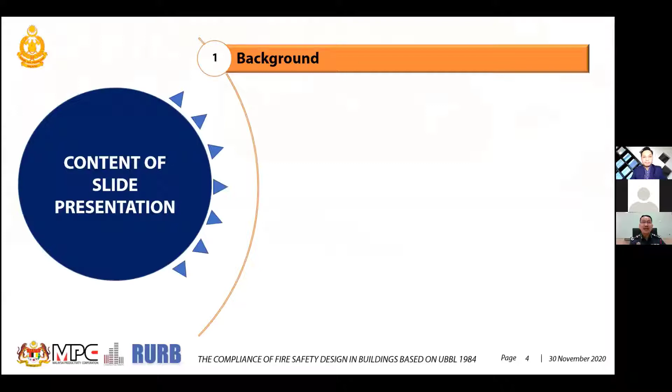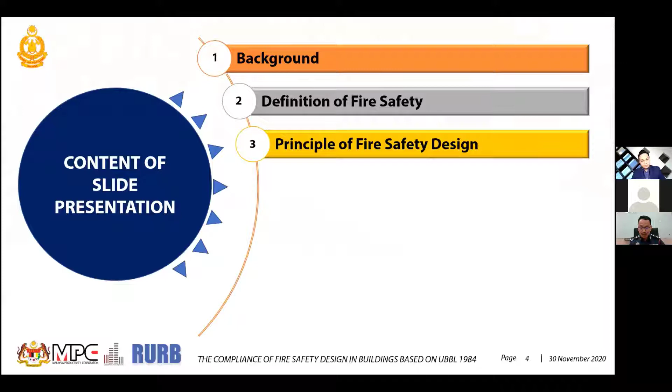Okay, I'm not going to give you a lecture, I'm just giving you a little glimpse. What is the fire safety design based on the UBBL? What is the spirit of the UBBL? We must remember the UBBL is not... the content is in my presentation. You have the background and definition of fire safety, the principle of fire safety, plan approvals, the problems pertaining to approval, and also the provisions in the UBBL related to fire safety.

I express it again, this is not a lecture, not a class. It's just to give you a glimpse of what fire safety is about.

If you go to other countries like the UK, US, and Japan, the awareness and fire safety concept for all citizens is very high, but not in our country. I hope that with this seminar we will be able to give understanding to the professionals here, from IEM, from PEM, and a few others, and to the industry pertaining to fire safety.

So I'm going to give you the concept, the principle of fire safety. This is very important to understand, so that as you submit the plan to us, as you design the building in our country, it's safe, and at the same time it can speed up and minimize the time, and it's good for you, good for us, good for the industry, and good for our country.

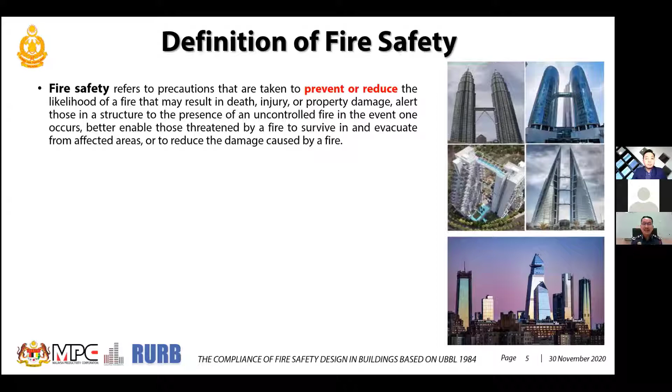Okay, if you see, under fire safety, the focus is on taking prevention and reducing the likelihood of fire resulting in death, injury, and property damage, and ensuring all structures can resist uncontrolled fire. I'm not going to read this one, but the concept here is to prevent and reduce any fire, and safety measures need to be taken. The next one.

What threatens fire safety is fire hazards - that which always happens and threatens and causes fire. By the way, as the moderator just told you, I was in forensics for almost 12 years, and I understand the design that leads into fire. In fact, I have gone to court for a few times for non-compliance cases where buildings caused fires.

So fire hazard is the one that threatens fire safety. If a layman wants to interpret what fire safety is, like Oxford Dictionary gives you a very clear concept: to adopt or enhance measures intended to minimize risk of harm from accidental fire, or safety from the danger and injury in the event of fire. This is a very layman understanding of fire safety - you could imagine if a layman can understand this type of concept.

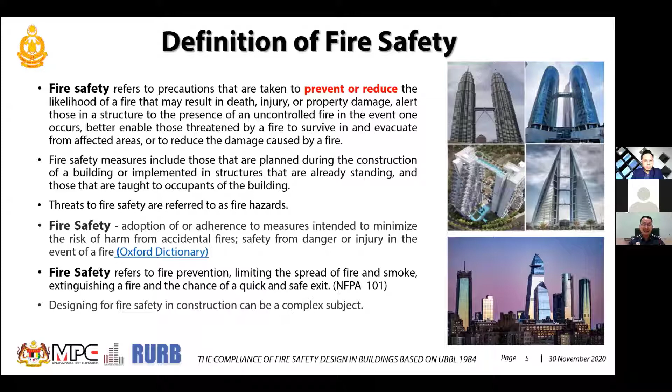To design fire safety in construction is a more complex subject - it's not like a standard. Next.

If you see historically fire safety design, the building has been concerned with innovative design. With this innovative building design, you could utilize fire safety engineering rather than having a purely functional based code. So we give room for architects, for designers, to achieve their innovative, cost-effective design to meet the fire safety design needs. Even though they have innovative design, don't forget the fire safety design needs. So fire safety engineering gives you room to further develop your design.

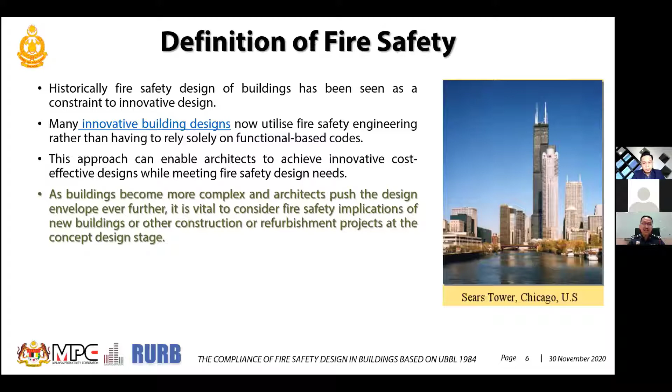Okay, next. To be a successful designer in terms of fire safety, we're looking into the issues, the components, and tracking the fire source - how smoke moves, heat transfer, and in other words the chemistry of that, and also human behavior and toxicity. That is all about fire safety as well.

The project's fire safety implementation depends on building regulation - what regulation you're going to use, what standard you're going to use as you go to us. Always remember, UBBL does not belong to BOMBA - it belongs to all of you and all of us. It's our responsibility to make sure that fire safety must be according to the regulation and to the standards.

I'm not restricted to Malaysian standards only - it could be international standards, whichever is more relevant and more applicable for all your design.

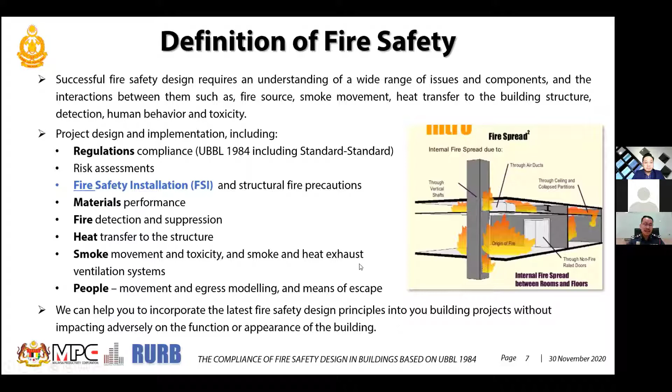Prioritize what fire safety measures take place in your design. Okay, and also the fire safety installations - I'm using the word according to the Fire Service Act: structure fire precautions, material performance, fire detection and suppression, and the heat transfer of the structure and so on.

So, in the past, almost 30% of plans are rejected when you submit to BOMBA. So in this case, that's why we are looking to discuss with professionals, to give you this seminar this time to tell you how we can reduce this.

We must have a strategy to reduce this. Unlike Singapore and a few other countries, where the responsibility of the designs - architects, engineers, and all the fire safety industry - they take fire safety as a very high priority. We don't want any fire to happen which causes death, like the Grenfell Tower and a few others recently in Dubai as well, and China as well.

See, in China almost every month there is an industrial fire, which causes loss to the country and also to industry and also job loss.

To achieve this, we need BOMBA and the fire rescue department to cooperate together with professionals and the industry as well. It's not our objective to delay or postpone your designs - it's our objective to speed up the whole process. But you have to work together, and you have to proportionally and highly consider fire safety as well, and this is the thing you need to prioritize. Next.

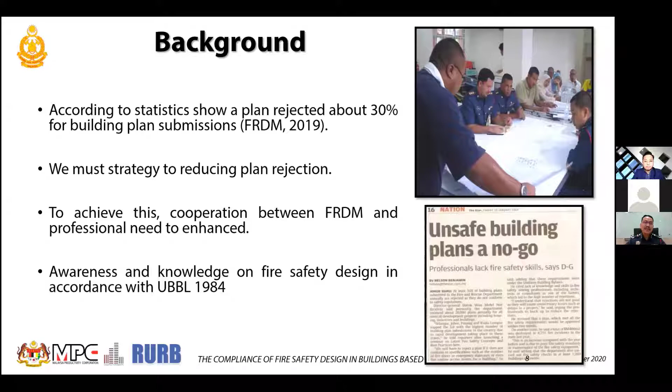The objective of fire safety in the building is, first, life safety. When a building catches fire, you must know all the occupants - that's why we're talking about human behavior. You must know who the occupants are; if the occupants are comprised of elderly people and so on, you must prioritize how to ensure life safety in that building. Number two is property protection, and also business continuity and environmental protection.

Praise the Lord, in our country we have not had a big incident besides that tahfiz case, where 26 people died. It's a very simple building, but it cost 26 people their lives. We don't want to hear that again. It's simple, but because of a few things we didn't do, suddenly it caused a lot of people to die. When I was doing the forensic investigation in this case, I could literally cry to see the children die - 26 of them.

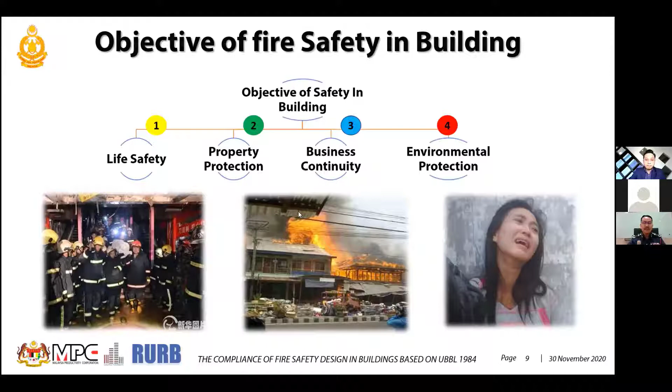That is something we really need to take priority on. Next, so we are talking about this - I'll give you a little bit of the concept. I'm not going to tell you in detail what fire safety is about.

The first one, according to UBBL law, is fire appliances access route. We have encountered a lot of problems because the KM was endorsed without any consideration of fire safety access roads. Some buildings, when they come to us, cannot proceed because the KM is already done. This needs to be prioritized. Those who do the KM, please take all these measures into account - the minimum perimeter, the width, the load or capacity, the gradients, the distance from the building to the end of the road, and whether it needs to be aligned so the turntable ladder can turn. All this must be included in the beginning part of the KM, because the fire and rescue department has not been consulted in terms of the KM.

So when you come to BOMBA, you already bring something already endorsed by the KM, then we run into trouble. I hope you take this as a priority - we don't want you to come to us saying the KM is already endorsed, then ask us how to solve the problem. If it's simple, we can solve the problem, but if it involves cost and involves space, it cannot be done, so we can't fix it. In the end, we delay the projects. We don't want that to happen.

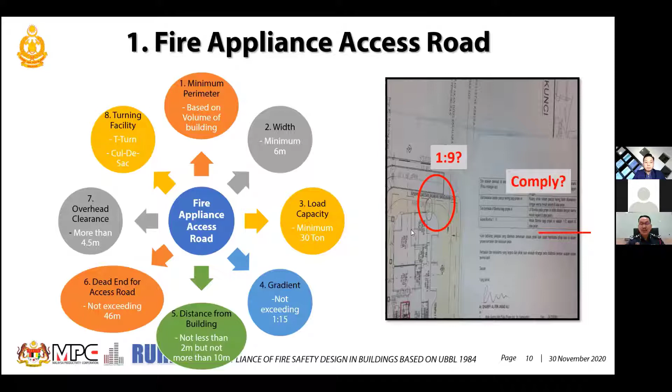Okay, next - means of escape. Prioritize this, as it involves life. For means of escape, make sure you design the travel distance accordingly, per Schedule 07, the dead end, the corridor, and also the exits - every part of the exit designed accordingly. There's a protected staircase and a firefighting staircase - two types of fire staircase. You know well, the firefighting staircase is the staircase that includes all the firefighting systems in the building, and also the firefighting access lobby. I'm going to introduce one more later on. The fire lift is also included.

Final discharge - this is one thing I'd like to talk about here. According to UBBL, final discharge means you go out into a safe place. But many times we fail to do this - let's say the staircase in the middle should go straight into the safe place, but we always go through a room or another place, or it could be 100 meters far from the final exit. That is not a final exit or final discharge.

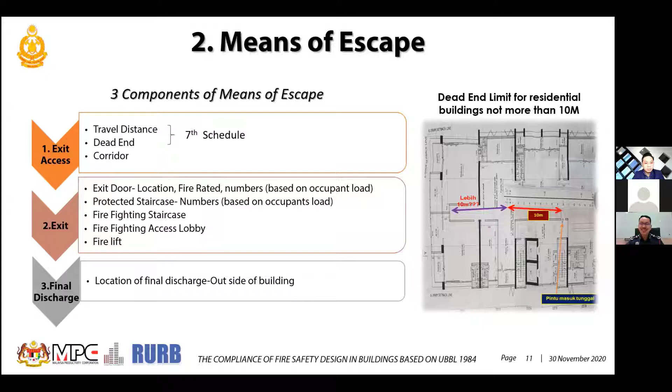If you can't provide a final exit straight to the street, you have to build a corridor. But that corridor - you're not talking about 200 or 400 meters. This is not a final exit. Okay, next.

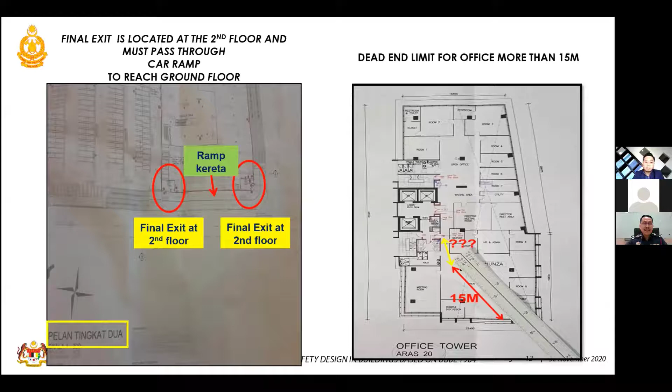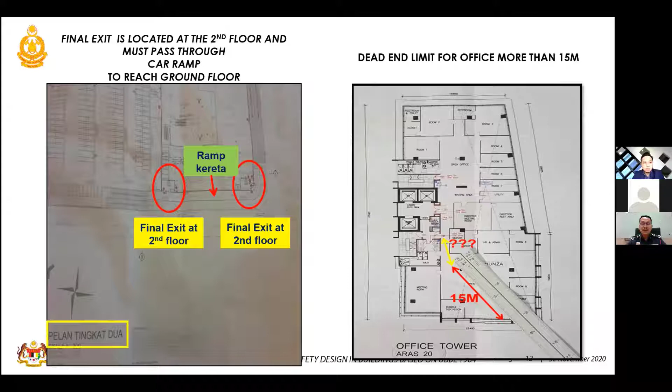This is what happens. If you see the feature here, the final exit at the second floor, then you have to go to the corridor and so on. Because you're already more particular about the design rather than the life safety, that's why it needs to be considered. Next.

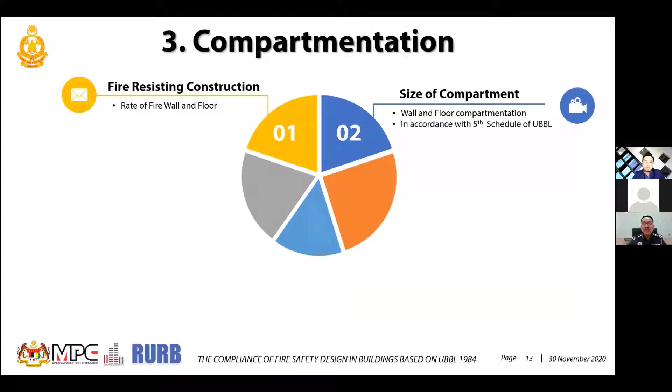Compartmentation. When you're talking about compartmentation, it's a fire resistant construction. The detail of the wall, the floor, and the size of the compartmentation. And then the next one is talking about the uses of the compartmentation. What is the uses? It could be different uses which need to be a compartment, like a factory and so on. So you have to consider this.

But we do a lot. If you cannot achieve the size of the compartmentation, now we allow you to go straight into the performance base. No need to go through the UBBL first, which we cannot comply with as well. In the end, you delay your process. So you go straight into performance base if you really can't achieve the size of the compartmentation.

The building construction, what is the building material? This is another problem because there's so many innovative materials coming and proven to be good, but for fire, as an authority, proven to be good must comply with the standards. If you can prove according to the standard, we have no objection to use it. But make sure it's not come today, produced today, then you say approved, and not declare yourself. It must be according to the standards.

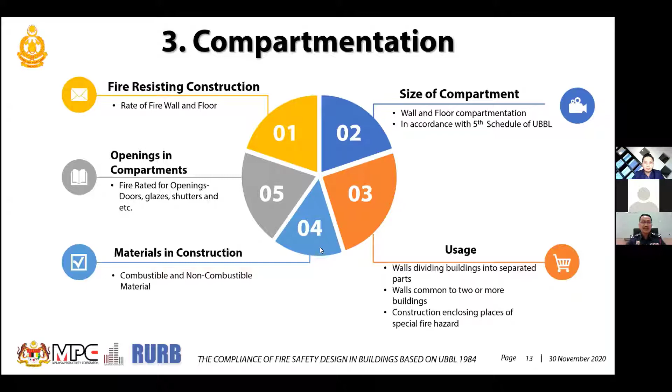Am I too fast? No, I think Ton, I think the pace is good.

Okay, so this is the compartmentation. You should do the compartmentation at your planning stage. If you cannot do the compartmentation, then you can go to PBD. We do a lot to do the PBD. Okay, next.

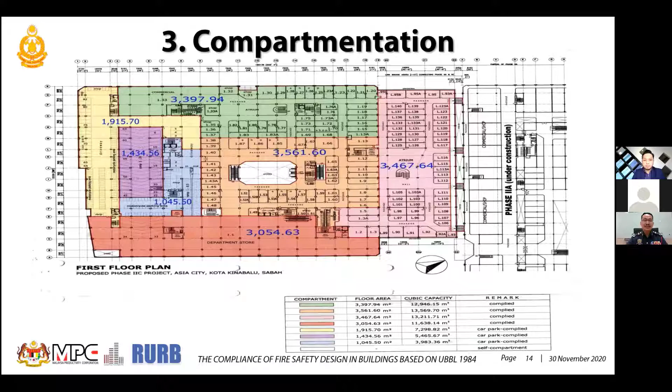The fire spread through the cladding, and this cladding is a material that has solid foam inside, and this has got a few places installed in our Malaysia. We try to abolish it and ask any building to replace it with another material.

One of that, if you see the fire in EPF building in PJ, they use the same material. Not long after the Grenfell tower, EPF got into fire. They're using the same material. I investigated the fire, and I know what's the cause.

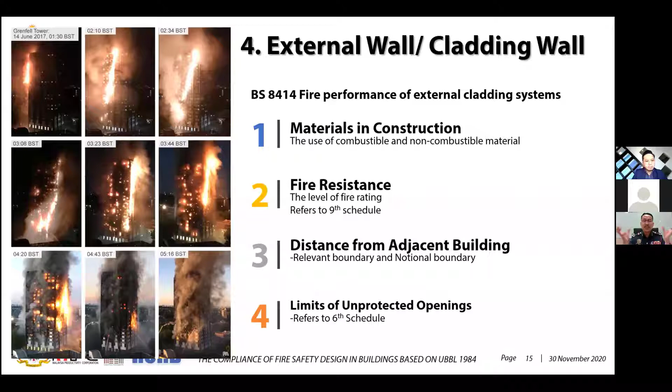So we want, in terms of, we must see when we get a building, about the material of construction, the fire resistance, next, and the distance from adjacent building, that's the distance, and also the limiting of the unprotected opening. So we come to a conclusion. We already met with proposals a few times and few series. We made a conclusion. Next one.

Next slide. Okay, any building more than 18 meters, or 18 meters above, the material used, the material and installation of the cladding must be according to the BS standard 8414.

Right, 8414. These are two types, two parts of the standard. Part number one is talking about fire performance cladding system, but more applicable to the masonry face of the building. This is a new amendment from 2017, and they use a test like a rain screen cladding and also the external wall insulation system.

Part two is performance of cladding system fixed to and supported by the structural steel frame. These are the two parts of the cladding. So in other words, after this, 18 meters above, the cladding must be according to this standard. No more, Class O and so on.

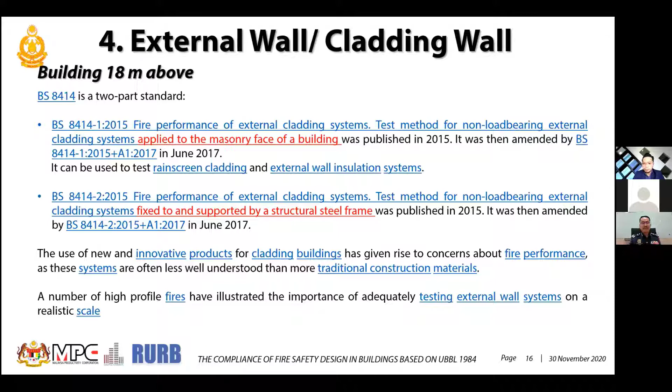Fire safety system. Fire safety installation system - maybe this is a new term you must be familiar with. This is according to the Fire Service Act, Fire Safety Installation System.

This relates more to occupants and automatic systems like emergency lighting, exit signs, and all the systems which are automatic in the building. You need to consider hose, CO2 system, smoke management system, clean agent, protection detection system, and also the sprinkler.

So as a designer, you must use correctly all these fire safety solutions. Let me give you an example. I just want to give you the example, later on you can ask a question. Those are related - it's my provocation.

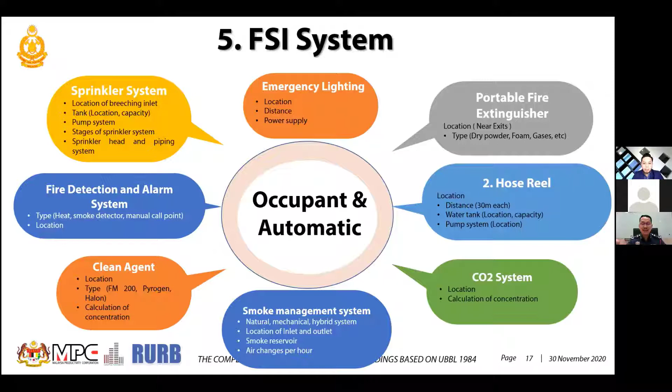Neyman, I know you have a lot of questions later on. Just note it down, then you can ask me later on. Okay, next.

For the firefighting system, for the firefighters, like a fire command center, in short FCC. Yeah, this is another one problem.

So often in the design - sorry, architect and engineer here - I have to speak up to clear out the confusion among us. Too often, the fire safety command center is always at the back of the building, and it is not protected.

By right, it should be well compartmentalized. When there's a fire, the purpose of the fire safety control room is so that you as occupant and also firefighters can go straight to that location without any confusion or searching all around the building. And also, the fire safety control room must be able to withstand fire.

We don't want the fire control room to catch fire first. That's why we need compartmentation - fire resistant fire compartmentation. The fire control room is very important. In other words, fire compartment -

the fire command center is like a nerve in our building's body. If the nerve is already gone, dead, isn't that a problem? So that is the importance of the fire safety fire command center.

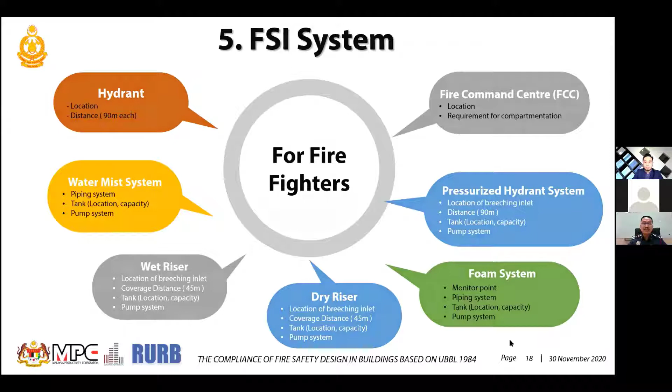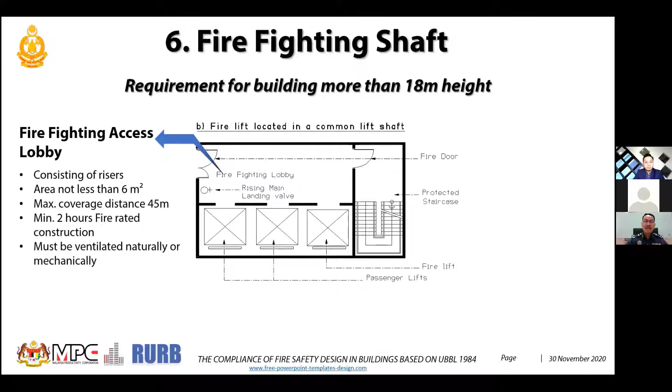During our UBBL amendment, we introduced one more shaft, we call it the firefighting shaft. This firefighting shaft is comprised of a firefighting lobby, firefighting access lobby, as per the UBBL wording, and also the firefighting staircase and fire lift. This whole thing is called a shaft.

Can you circle those areas? All this we call it shaft, the firefighting shaft. For the firefighting access lobby, we are using a maximum coverage distance of 45, and all other requirements. For the lift, we use 60 meters, but it's a distance - it must be according to if you need to go to the room and so on, not the round trip. And also the firefighting staircase, that's the very easy one. This is the firefighting shaft.

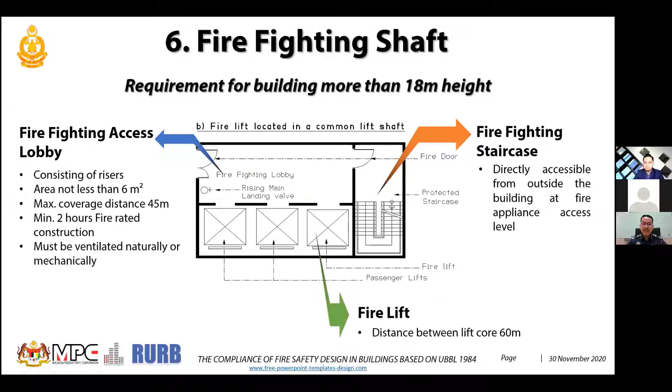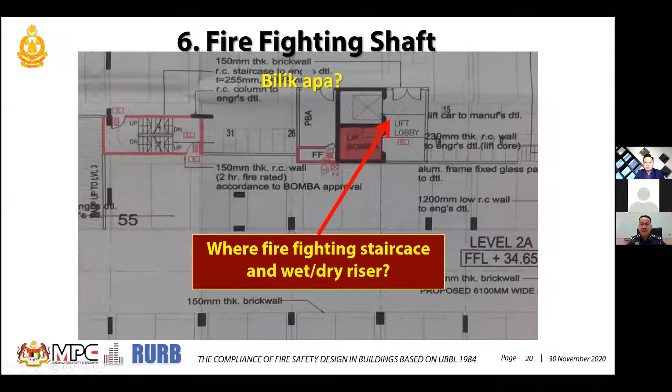Let me give you a sample, let's see this one. This building - I'm moving the cursor but you cannot see it. This is a firefighting lobby, lift lobby. It should be a firefighting lobby. You didn't see any firefighting staircase, and you didn't see any wet riser or dry riser system there. It's a standalone, never mind.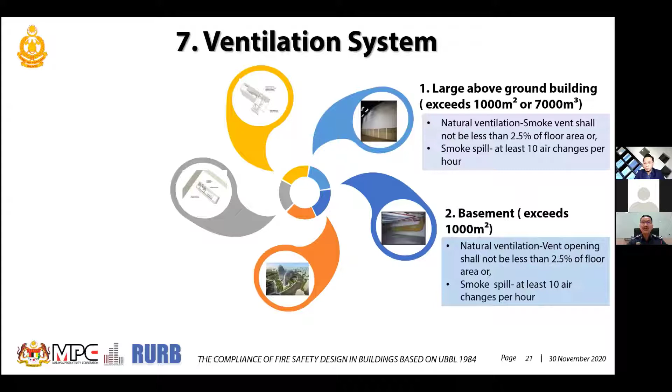Ventilation system: you need to consider this in large above-ground buildings exceeding 1,000 meters square or 7,000 cubic meters. You need to provide ventilation, and also the basement exceeding 1,000 meters square.

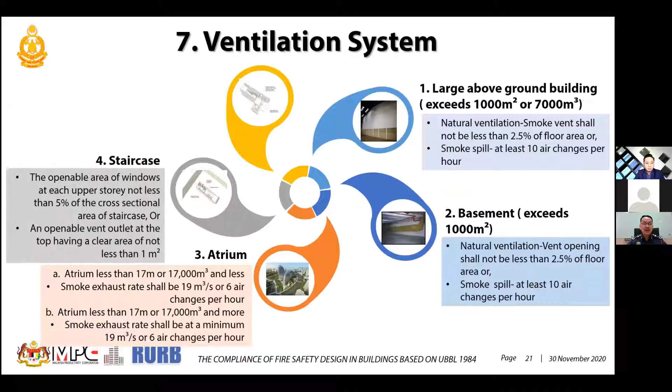The atrium, you need to provide ventilation. I don't want to elaborate more because you can read it over there. The staircase needs ventilation. And the smoke lobby, all these need ventilation. So you must provide ventilation, either natural or mechanical ventilation. Let's say the staircase as well - if your staircase doesn't have enough ventilation, people who need to use the staircase, it could be painful. So you need to provide the ventilation.

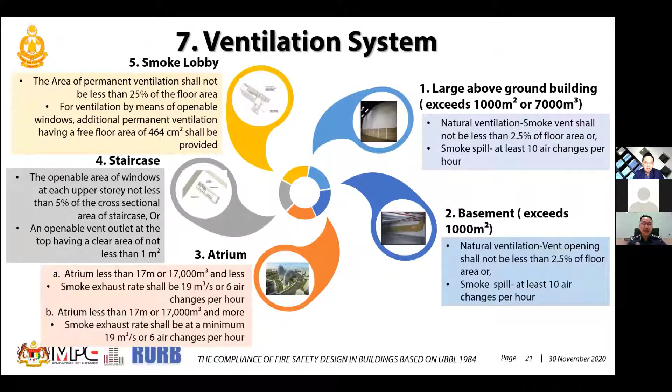Next, we have a special requirement for hospital design. Those who want to design a hospital, we should check this. We introduce the refuge area, which uses horizontal evacuation. And the calculation of the area should be 2.8 square meters per person. So we are looking at this seriously after discussions with the fire department and also Jabatan Bomba.

We need to have a refuge area so that the bed or the patient can be moved into the refuge area. You cannot hold the patient because the patient is already connected to the system, the ventilator and so on. So the best way is to move all the equipment and also the bed into the refuge area. That is the recommendation for the refuge area. And also the escape bed lift - there's another recommendation for the escape bed lift.

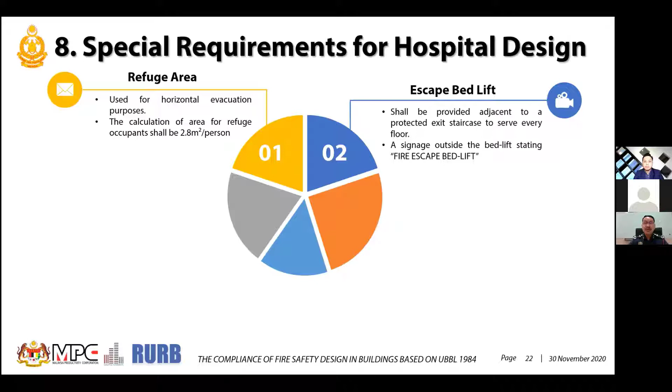Next, the staircase design. The staircase design is not like a normal staircase. Conceptually, the staircase must be able to accommodate the bed size. Next, the width of the door, so that when you swing the bed through the door, it doesn't get stuck.

I think this is a challenge for the architects to design a new building. Probably there's no problem, but when you're converting another building into a hospital, they get challenges like that. That's why before you design, before you make a decision whether that building can be converted into a hospital, you better do your assessment first together with the developer or the owner. Is it possible or not?

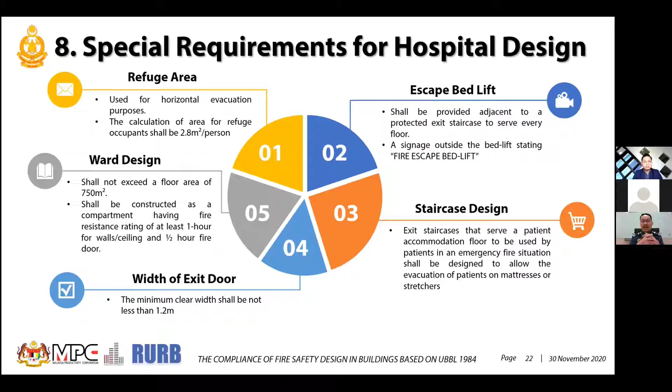Next, fire shutter. I want to read this one carefully because there are a lot of issues with fire shutters.

The fire shutter is permitted for use as a compartment wall. We permit its use as a compartment wall, except for compartmentation for the fire command center, FCC, means of escape which includes the staircase, smoke lobby, fire lift lobby, firefighting shaft, and internal exit passageways. For those, you cannot use a roll shutter.

No replacement. Okay, next. But the fire shutter used to cover an opening in the compartment wall or floor must have the necessary fire resistance, including thermal insulation, not less than the compartment wall. So you have to use a shutter with thermal insulation, an insulated fire shutter. You cannot use a normal shutter.

Is it clear? Okay, next one. However, the fire shutter installed at the edge of the atria, the void of escalator area between floors and the doorway, does not need to be a thermal insulation fire shutter. We give you this exemption. So this is very clear in terms of the use of fire shutters.

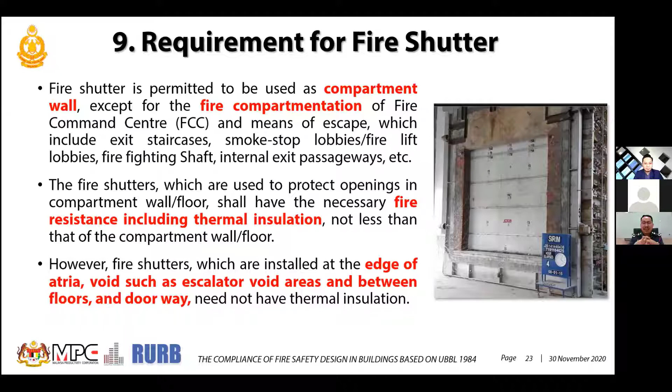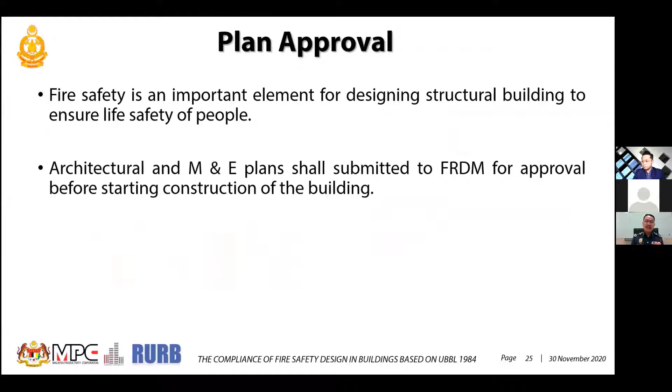Now talking about approving plans. Fire safety is an important element, as I mentioned just now. Next, I think you all know this: the architect and M&E plan must be submitted to BOMBA.

Am I right? I know you're going to ask me a question later on. According to the bylaw, before you start the work, section 252: plans, drawings, and calculations of the fire installations and extinguishing systems shall be clearly identified to certify to the DG. Did you understand?

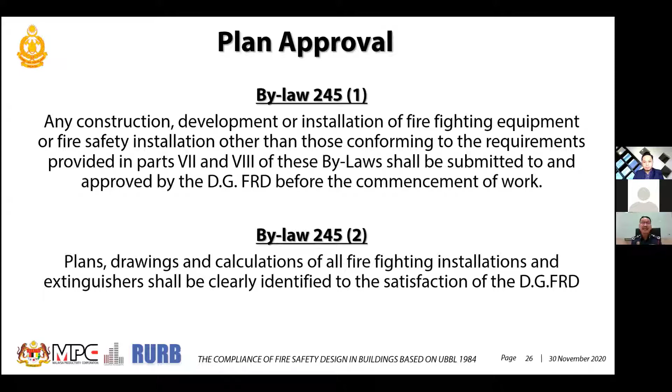And then the plan for architects, according to our charter, it must be approved within 14 days. 14 days we must approve, or verify within 14 days. We try our best to achieve this.

But if the architects or engineers can do it well, to clearly identify to us the fire safety installation system and so on, probably this work can be achieved quickly. But if not, we have to study it one by one again and verify it, which takes a long time. So we hope, and our objective is, that the professionals, the architects and engineers, can do well in their design in terms of fire safety, so that they can help us verify it easily and quickly. Clear? Next.

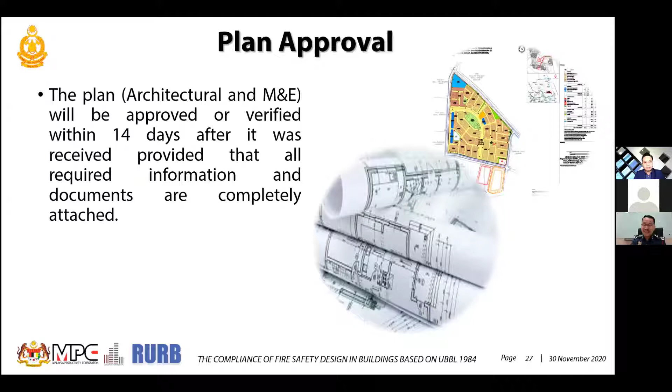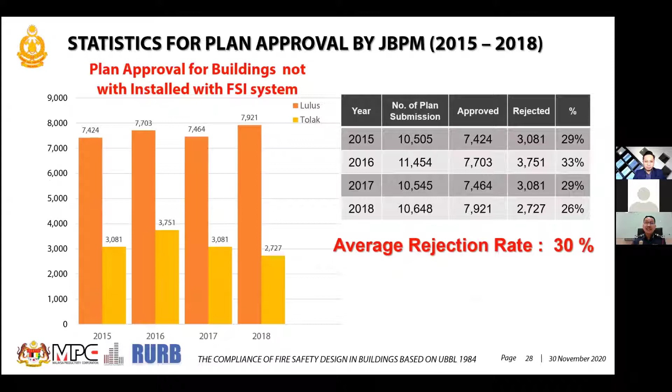According to our statistics, 2015-2018, for approved buildings that didn't install any other firefighting system, just a simple system, 30% rejected the plan. The next one, with the system, is up to 45% rejected. This is very high. So our work here, almost 45% is not according.

We want it 100% after this. Agree? If you can't achieve 100%, 90% is also good enough. Then you become a negara maju.

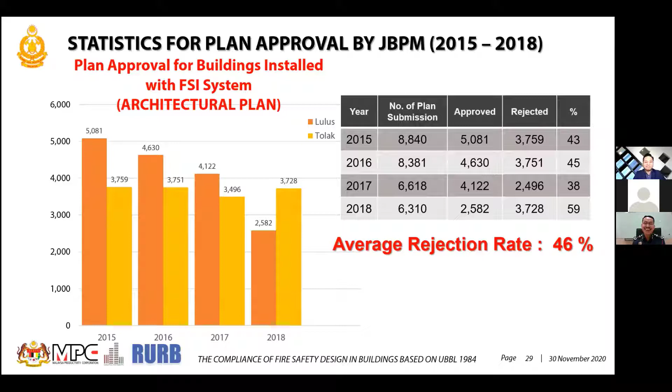The M&E plan, 37% reject. Sometimes the rejection is over a small matter. And one thing I have to verify to you all, the PSP or architect, M&E, like to do this: today they submit the plan, tomorrow they submit another amendment, another day another amendment. So we know there's no end to the job. So we have to call them, call the owner, call the developer, call the contractor, call the PSP as well. Sit down together. What happened with this one? It causes you delay. We have to reject it 4 or 5 times. That's not good. We don't want to handle a project that long. We don't want to drag it. One time is enough, we can endorse you so we can progress.

In terms of our KPI, instead of studying 5 times reject, we want only 1. The KPI is that the plan is approved. It's not our desire to reject your plan, just to make it clear.

Next one, this is CCC and so on. I think I don't need to go through this one.

Next, and one more thing, before the CCC inspection, now we introduce that the PSP, either your engineer or architect, verify first and do inspection before BOMBA comes. We give you a form to check. Please use the form to make sure you do the checking first before we come. So when we go for inspection it will progress, and we can speed up giving you a CCC if everything is in good condition.

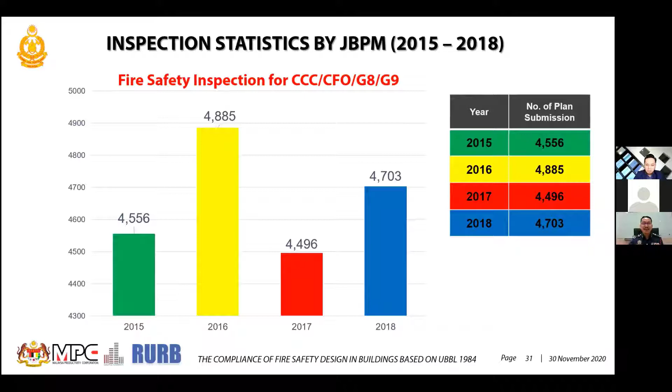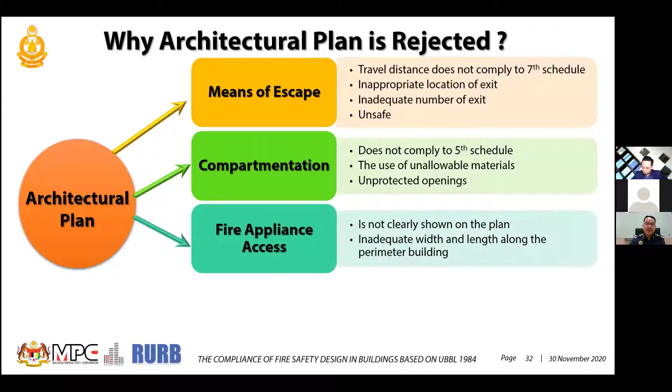Fire appliance access road access, already mentioned very long just now in the beginning of my talk - this is always a problem as well. Firefighting system, fire safety installation system, FSI, also didn't comply.

Am I still got time or not, moderator? How long is my time? Yes, well, we can see a lot. Yeah, no problem, no problem. I want to give room for those who want to ask a question as well. Actually there's quite a number of questions, but I think we're also coming almost towards the end already. Yeah, I think it's good.

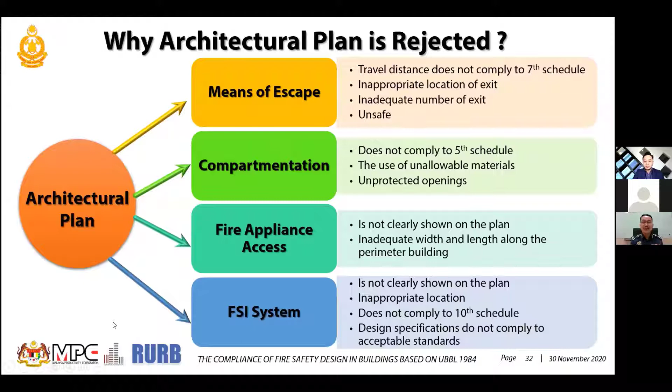Next one. Next one. Next one. The ME rejection, I don't need to go through this one. Next one.

So what happens next? What happens when things are rejected? Number one, the reason is lack of understanding of the fire safety principles and concepts. I hope every PSP - I know you have junior architects or junior ME - please guide them.

One time an owner came to me and said, Tuan, I don't want to deal with this PSP, very old lady, 80 plus, hardly see him. I said you have to liaise with your PSP, please don't do that. I know you're old but you must guide the young one, and we don't want that kind of complaint about the owner.

And I receive this type of complaint a lot. Even during our presentation, the developer argues with the PSP - you didn't do your work well, and so on. We have to safeguard you also. I do respect that you are professional, and I always keep in mind that you're professional because I want us to work together and cooperate together.

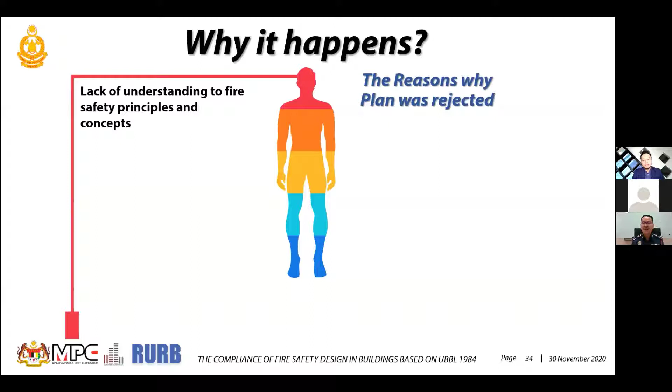If I go down, why can't the PSP? If they're too old, why? I cannot also go in time to complete. I don't want to let him go also, correct? So please guide them and give them the authority to do it.

Number 2, lack of knowledge regarding fire safety, especially among young architects and young engineers. I think associations like PAM and IEM should do something to improve this. We also have to improve how we develop fire officers. I'm not saying fire officers are good, there is some we need to improve, as well as young architects and young engineers. They have to understand the concept as well, because they are dealing with something very important, fire safety. So they need to be well versed in these things.

If the PSP did well, we wouldn't need to revise the plan. We can straight endorse it. We hope that is our desire, to lighten our jobs. This is our desire, so please guide them with the knowledge, and also maybe later on I will talk more about the solution.

Number 3, plan done by others rather than PSP. You understand what I mean? Yeah, I think you understand what I mean, I don't need to elaborate here.

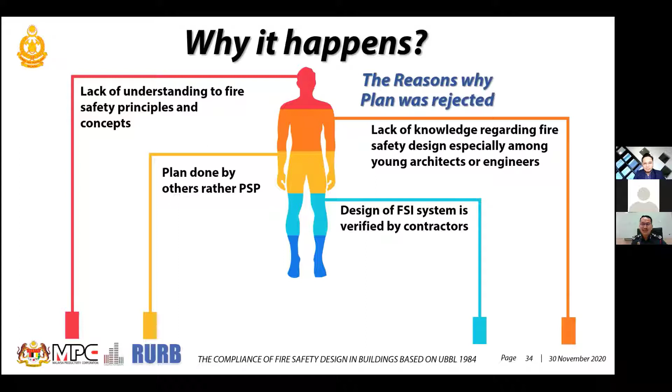Then the design of the fire safety system is verified by the contractor. The contractor does it. Until one time the contractor comes to us, we are the one who questions, where is your PSP? I say, please, if you do that, don't need to tell me, but you must know what the contractor does. All right? Next.

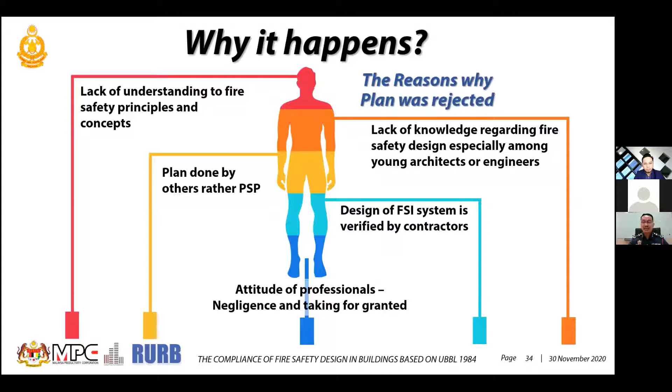Simple mistakes during plan submission are a lot. Until now we need to introduce a checklist during submission. We're going to introduce this, I'm going to tell you now. When you submit the plan, you have to use a checklist, okay, this one got, this one got. If not, you take it back, you're going to take it back. We don't want to waste our time studying an incomplete plan.

Number 1, plan submission after the building is completed and constructed. After the contract, at the end of construction, they come to us, then the agent, this agent. Can you imagine if 10 people think they're an agent, everybody is an agent, how do we do the work? And then they complain to the stakeholder.

We are not supernatural also. Please submit the plan at the beginning. There's some consent here also, lah. Some of them, the PSP told me also, because if I submit to you now, they keep on changing, same thing also, lah. Then you have to deal with the developer. The developer, until one time I say developer, you must have a final say, final decision, no more changes already.

Coming to us, so another one, once a building is already completed, when there's any alteration or any discompliance, you cannot do it at all. That creates a problem. At the end, the building is constructed without proper fire safety. Now the fire safety system and so on, the design of a building frequently changes, and others, now I'm telling you, it's now keep on changing. You must tell the developer also.

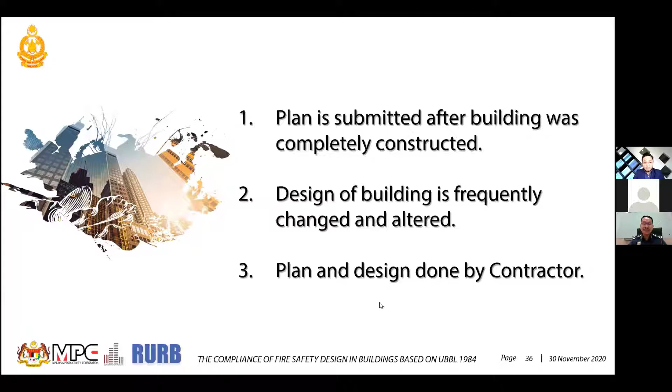Need to discuss. Okay, another one is plan and design done by the contractor, as I now mentioned. Next, but by the way, the plan by the contractor, I went to a NFPA conference recently.

Now even the contractor, even the manufacturer has developed a computerized system like sprinkler and all that. They develop it, you can use it, it's okay, but you must understand. Don't let the contractor do 100%. You as a consultant must understand also to use it, the computer simulation, calculation they use, the fluid and so on.

We agree with that. Next, our solution. I come here to seminar because I want to solve the problem, not to create a problem. We want to work together, the best we can, to solve the problem so that it benefits each one of us, not only BOMBA, not only US PSP.

What are we going to do? We are planning to register fire safety contractors, number one. Number two, we introduce fire safety code under the Fire Services Act later on, rather than UBBL. In principle, I agree with that. We're going to introduce it because to amend UBBL is so difficult, it involves a lot of agencies and so on, so we rather use the fire safety code under the Fire Service Act.

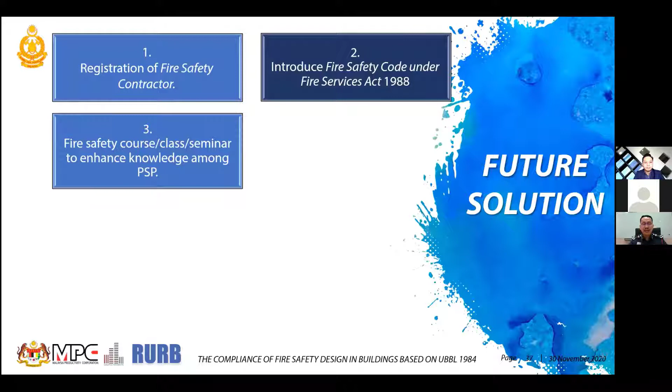I'm still talking about this one, I don't want to implement it now. Of course the government has to implement it, but I'm still talking to give you a chance to prepare yourself. It's not fair for me to do it immediately, so we develop the system now.

We are computerizing the system. All things now submit into the plan and into the online system. Every time the plan is rejected, it will automatically mark and affect your rating. We're not going to penalize you, just a rating lower lah, that's what the government desires.

And register fire safety facilities, also they will go toward that. Next one, the other facilities, and registered fire inspector to help you inspect the building.

Nowadays, everybody inspects. That's why when I go to the site to do the inspection, there's 100 people around together to do the inspection. I say it's not necessary, just those relevant only to do the inspection. I want to talk to the PSP, talk to the engineer, it's also very difficult. I don't want to simply talk there in front of unnecessary people. Am I correct? Isn't it happening?

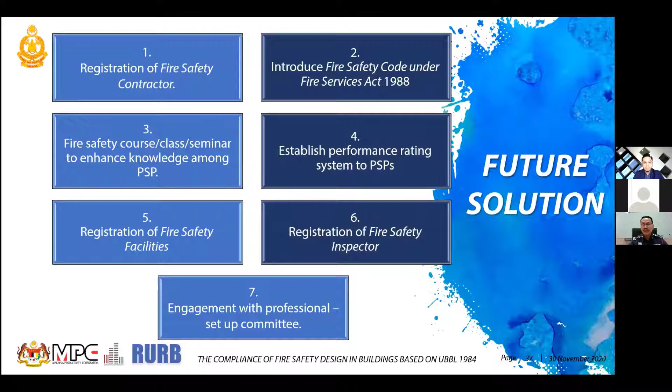Okay, to engage professionals, engagement with professionals, we set up a committee. We call it professional meeting in our Fire and Rescue Department. We hope that in the future, after COVID later on, we can work more often to do the consultation engagement. Next.

Submitting plans through e-premise or OSC 3+. We are developing a new online system now, e-premise. You may not yet submit the plan, but you can register first through e-premise. We are developing this so that e-premise will comprise plan submission until enforcement or until fire clearance later on. All is there, that's what we're going to develop now. And if the government has enough fund, probably plans can be submitted through online as well, but it's depending. We are preparing for that.

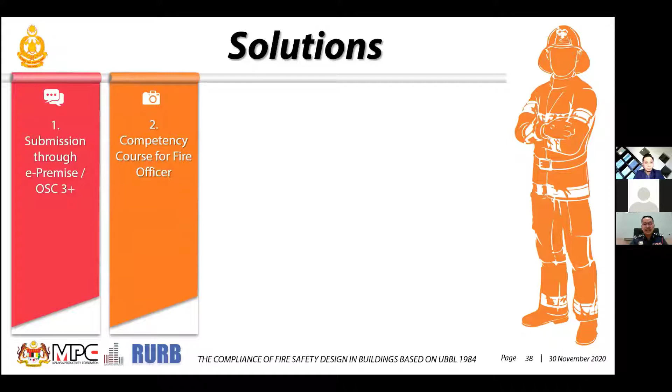Number 2, competency of our fire officers as well. We do that, we are giving comprehensive courses and so on.

Next, review the plan as a team in the committee. We don't want one person to do it alone, we review it as a team.

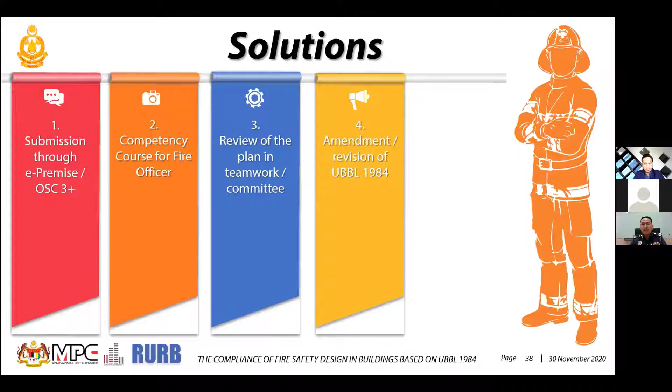Next, amendment of UBBL. We already did the amendment, together with IEM, PAM, and so on. We already submitted it to our legal officer. Hopefully next year we can use it, the new amendment, there's a lot of new things. Maybe next year we will work together with PAM and also IEM, we can go around to different places to explain what the amendments are about.

Number 5, to engage and cooperate with the universities. I hope universities, if there are any participants here from a university, will take ownership. We want to work together with you to enhance our fire safety engineering approach, as much as we can.

Because now, what more to say, we are introducing fire safety managers and fire safety officers in designated premises. This will take place. The act, the regulation is already endorsed and already enforced. Just because of COVID, we are delayed a little bit. So after this, the need for universities together with BOMBA is there. Hopefully the universities will respond positively about this, like other universities in the US and UK.

For instance, I visited one of the universities very well established in the US, like Maryland University. They work closely together with practitioners and the fire safety industry. We hope that it will happen in our country too. We cannot just rely on whatever is overseas, we should develop ourselves also in our country. Correct? True.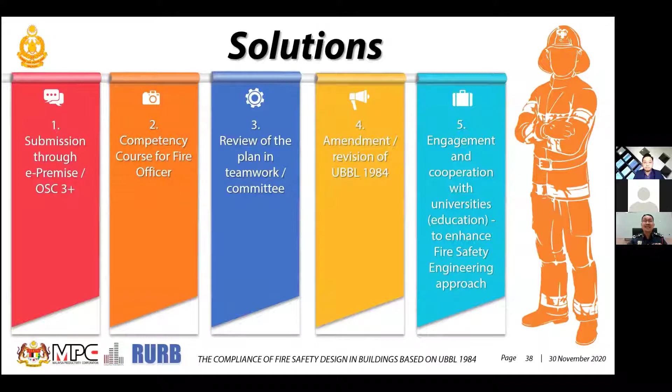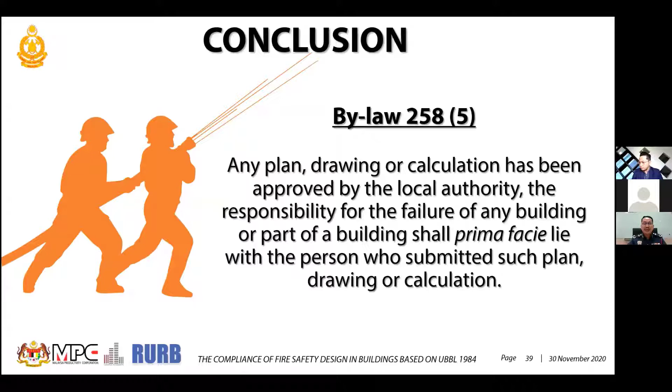In conclusion, at the end of my talk, any plan, drawing, or calculation that has been approved by the local authority, the responsibility for the failure of any building or part of the building shall be prima facie with the person submitting such plan, drawing, and calculation. So read this one carefully, the responsibility is there. With that, I end my talk, and I have yet to receive the questions.

No, there are a lot of questions. 35 questions so far. How do we go about this? I'll pass it to you, the moderator.